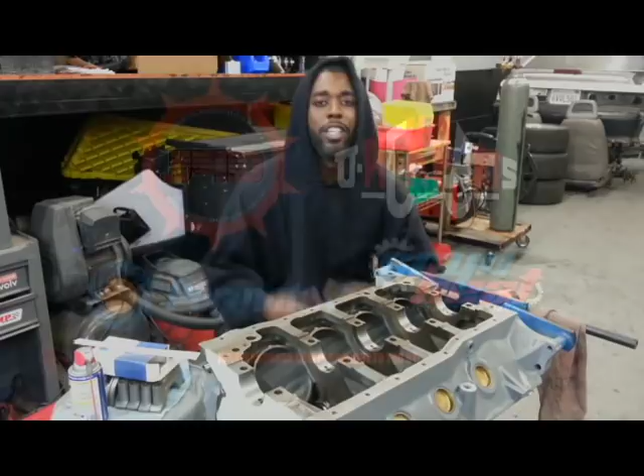So check it out. Project Mayhem, we got the block. Everything has finally been done, you know what I'm saying? So we've got the parts balanced. We got the pistons, the rods pressed onto the pistons. Everything's been done. So we're finally ready to actually put this motor together. It's been about a year.

I want to thank all y'all for being patient, you know what I'm saying? But hey, got to do it on your budget, you know what I'm saying? And sometimes, you know, it costs a little bit of money to get it done, but we're getting it done, you know what I mean?

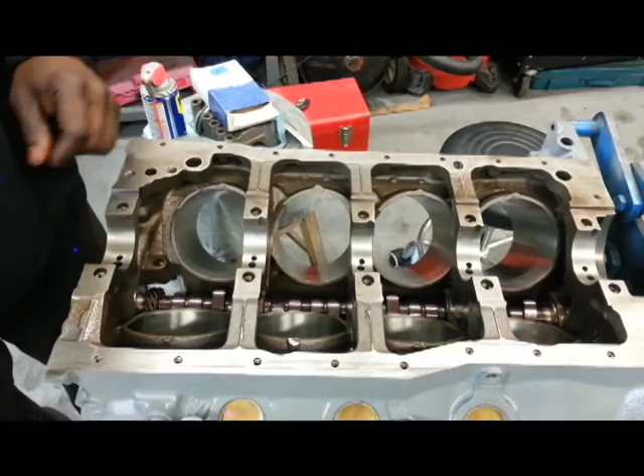So the next step, we installed the cam a few months back, and then I covered it with a bag and put it in the corner. So what we're looking at now is we're going to install the crank. The first thing that you have to do when installing the crank in the 302 is you got to make sure that these holes here, these are oil galleys, right? These oil holes, you got to make sure that they're absolutely clean. There should be nothing in there.

If there's something in there, you have to get it out, or you'll have oil pressure problems and you'll ruin the new bearings, and potentially your crank can have some catastrophic failure. So the first thing you want to do is check in these holes. Basically what these are for is when your oil pump is pumping oil, it's pumping oil through these little holes, and it makes a slick layer between the crank and the bearing so that it can rotate smoothly.

Okay? Now if there's something in there, it will not lubricate properly and it'll just burn the bearing up and you'll have a knocking motor in no time. So you got to make sure that these are clear. Whatever you got to do, maybe look down in there with a flashlight, make sure that they're absolutely clean. The next thing, you want to make sure that you take the bearing with the slot in it. As you can see, that one goes at the base, and this slot is to allow the oil from this hole here to pass through onto the bearing surface and to the crank surface.

Okay, the bearings that are on the top side look like this, so it's enclosed. So please guys, do not make that mistake. If you put these on the bottom, there will be no oil to your crank. It will destroy your motor in like a minute. All right, so you don't want to touch the surface with your fingers. If you want, put on gloves. Works a lot better, but I don't have any gloves right now, so I just try to make sure I don't touch the surface.

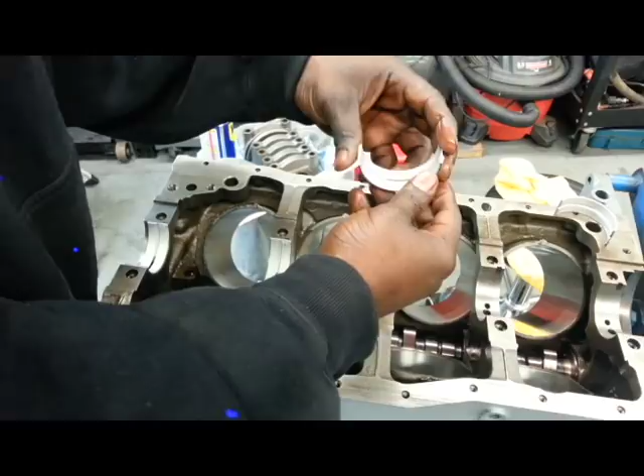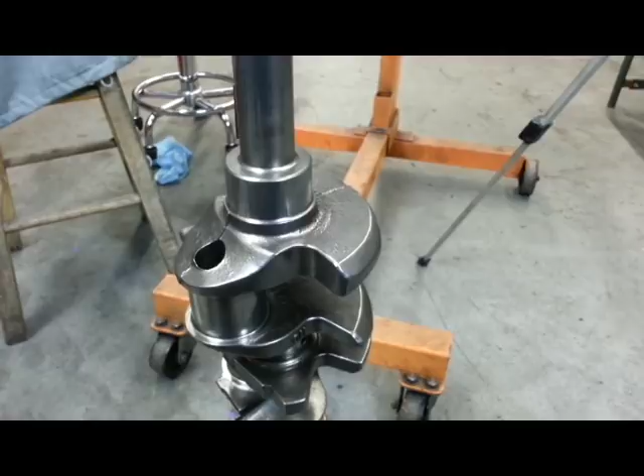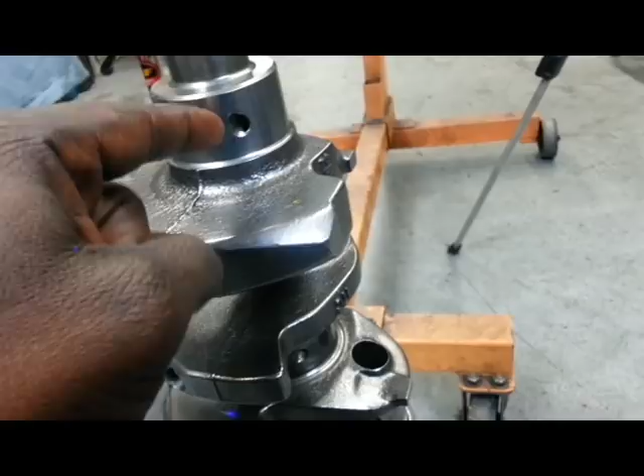Try your best not to touch the bearing surfaces, because apparently the oils from our fingers break down the bearing surface a lot faster because our bodies are real acidic. The next thing after we install the lower main bearings on the block is to check the crank. So what I did was I took air and blew through each one of these holes just to make sure that they're clear and free of any debris.

So you're gonna blow air through it, and then you're gonna look, because like I said, any debris that gets in there is gonna get in the oil and then ruin the bearing surfaces.

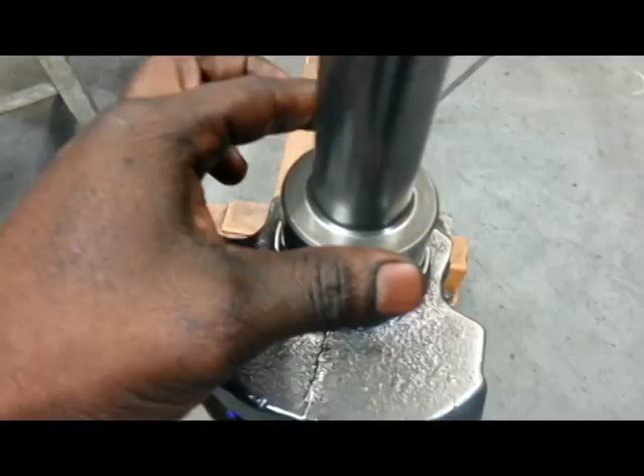Okay, so this crank has been cryo heat treated, which is basically cold forged, and then after that it was micro polished. Okay, so I had it turned before I did all that, 10/10. So it's 10 thou undersize, and I bought the bearings to match that. Now what that means when I say 10 thou undersize is that on this crankshaft surface right here, it was 10 thousandths of an inch thicker. All right, and I had them take off a layer because there was damage and take it 10 thousandths thinner.

All right, so when you do that, the bearings have to be 10 thousandths thicker to compensate for the thinner journals, which are these areas right here on the crank. This is called a journal. So once we do that and everything checks out, you want to check the journals to make sure there's no nicks and everything. Just one final go over. And at this stage, we're going to put it in dry. Now, once you install it, do not rotate the crank.

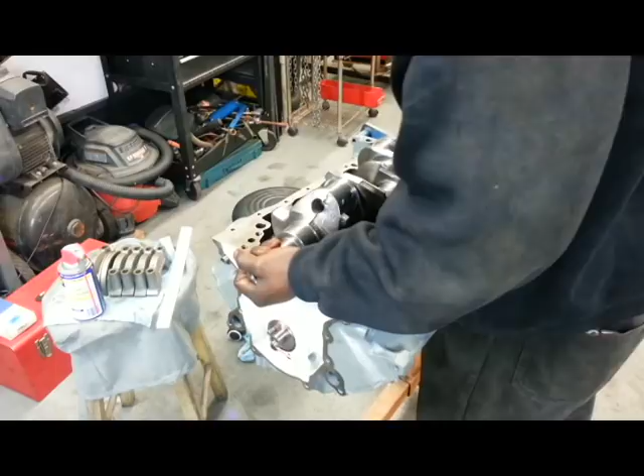All right, so we're going to get ready to drop the crank in. I can't stress this enough. Man, you got to be super careful when dropping it in, okay? So we're gonna just take our time here, just rest it in place. Boom, there it is. Now, like I said before, do not rotate the crank. Leave it. Don't rotate it at all, just leave it as it is, okay?

You take a piece of Plastigage, it's like a thin piece of plastic, all right, and you cut it to length and you place it on the crank, okay? Just in the center, vertical, in a forward and backwards position, just like this, okay? Just rest it on the crank. Don't press it in or anything like that. Don't gotta go crazy with it. But you're gonna cut it just enough to go across the surface of the journal. You're gonna place it right in the middle, okay?

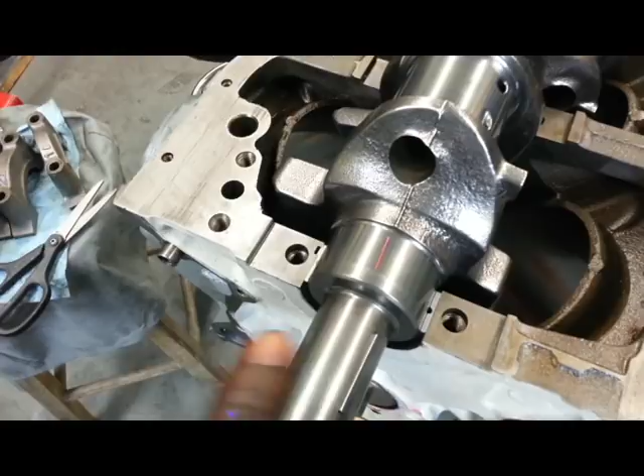So basically, to explain this in crude terms, you're measuring the clearance by the amount of squish. Squish meaning how much the bearing actually presses onto the journal. So we're going to see the actual space in between. So there you have it. It's a piece of Plastigage right there on the crank. Try your best not to disturb it. Like I said, do not rotate the crank when the bearings are dry.

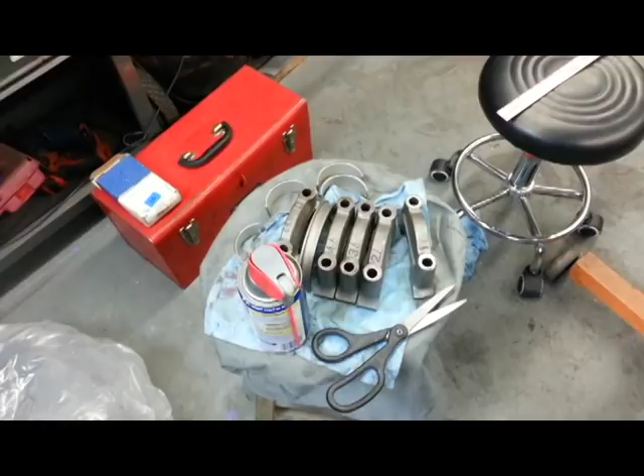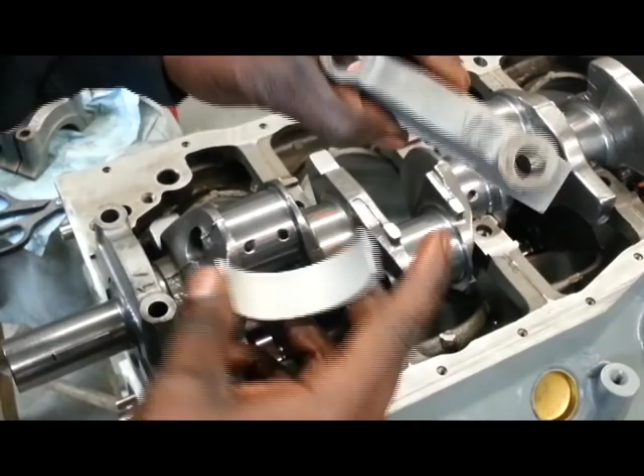And what we're going to do now is take the main caps here, install the cap bearings, and then we're going to go ahead and put the caps on and torque it down to spec. All right, so the goal here, what we're trying to achieve: get the bearing here, okay? Get the cap, it's number 2 cap. Make sure you keep them in position because there's 1, 2, 3, 4, 5. There's an arrow on them. Thank you, Ford, for that. To face forward to the front of the motor, which is right here.

Okay, and you take the bearing, and they got that little groove right there. And boom. You stick it right in there, just like that. Okay, make sure it's flat. See, that side is up a little bit. See, it's not cool. So you just press on that side. There you go. And there it is. It's in there. Now what you're going to do, carefully without disturbing the Plastigage, you're going to just rest it down in there.

Now these caps have a little bit of an interference fit, so you just take a rubber mallet here. Now you're not going to pound on it. Okay, I'm just going to give it a light tap, and it's in there. Okay, you move on to all the rest of them, do the same. Then we'll install the bolts and the girdle at the same time, because we want to torque it down with the girdle, because that's how it's going to be torqued. So we want to make sure that we get a proper reading with the girdle.

This is an engine girdle. This stops the caps from walking back and forth under high load. A great concept for supercharged motors, all right, which is what we're doing here. All right, so at this stage, when you see that all the caps are on and they have been tapped into place, we're going to take this main stud girdle.

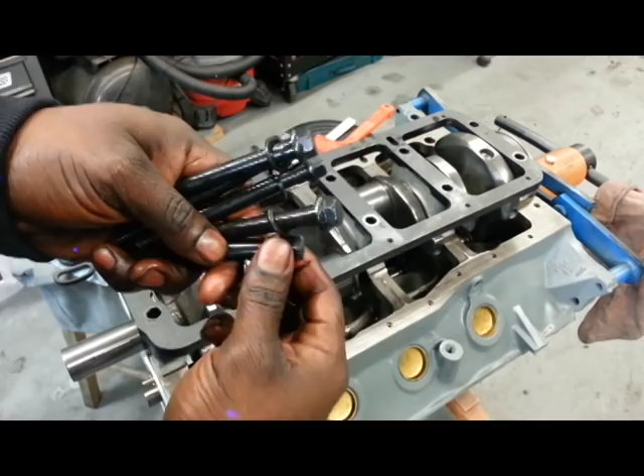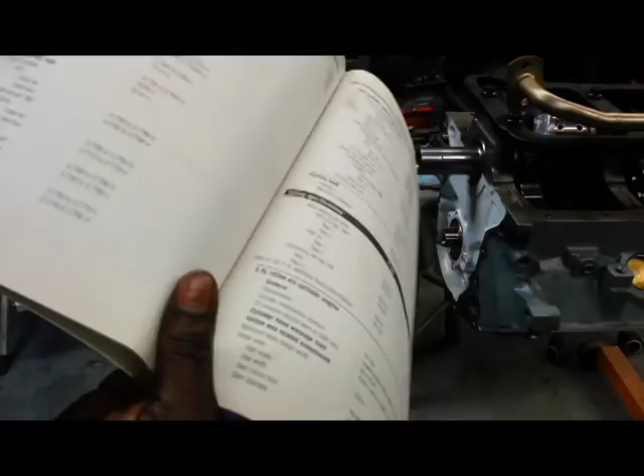Like I said, this stops the caps that are very thin from walking back and forth. All right, now the studs that I have here all come with washers except for one. And the reason why one of them doesn't come with a washer is because it actually holds the oil pump pickup in place. Now, no matter how long I've been doing this, I still refer to the manual to always be sure. You don't want to guess something like this. It's a very important stage in building a motor.

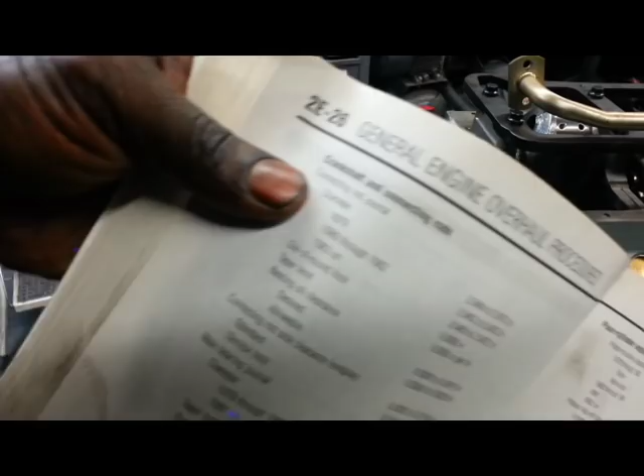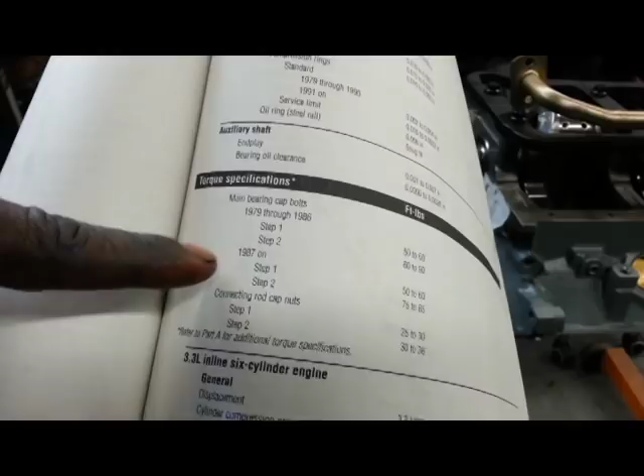Okay, so you're gonna see the crankshaft and connecting rods portion of your manual. This is a Fox body manual. I showed you guys when I picked this up sometime last year. So you're going to look for the torque specifications, as you can see here. And this is a block from a 96 Explorer. So we're going to say 87 on, and it's a two-step process.

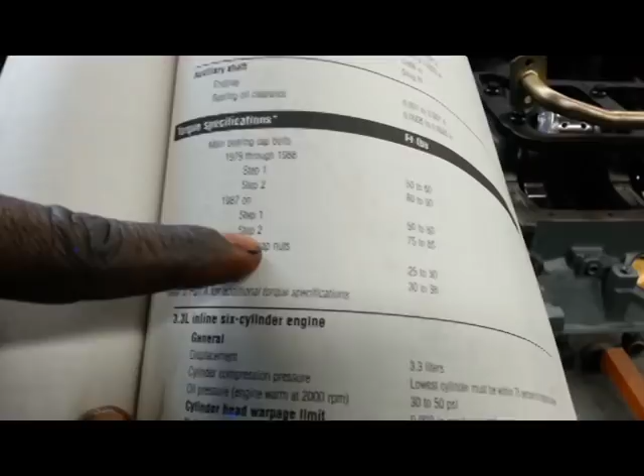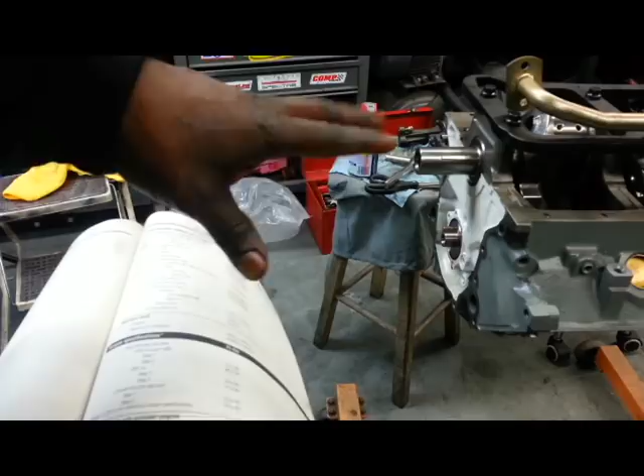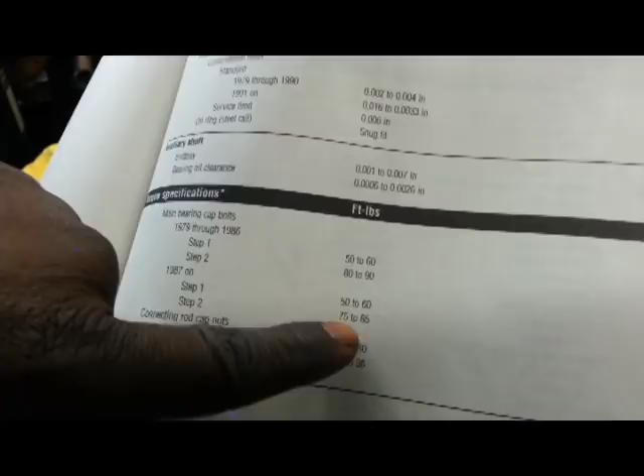So it's 50 to 60 foot-pounds at first, and then you finish off with step 2, which is 75 to 85 foot-pounds. Okay, these are not ARP bolts or anything. If they were, ARP has their own torque specifications and their own torque setup, but these are not ARP bolts. These are bolts that just came with the girdle. So what we're gonna do is first torque it down to 50 to 60, so I'd say right in between, 55 foot-pounds, and then we'll finish it off right in between at 80.

And when you're putting these bolts in, you want to make sure that there's oil on here. You don't want to put them in dry. When you put them in dry, it causes unnecessary stress on the bolt, and it can actually cause them to potentially break. So that is something that's also mentioned in the manual as well. The Plastigage underneath the surface here is going to squish down.

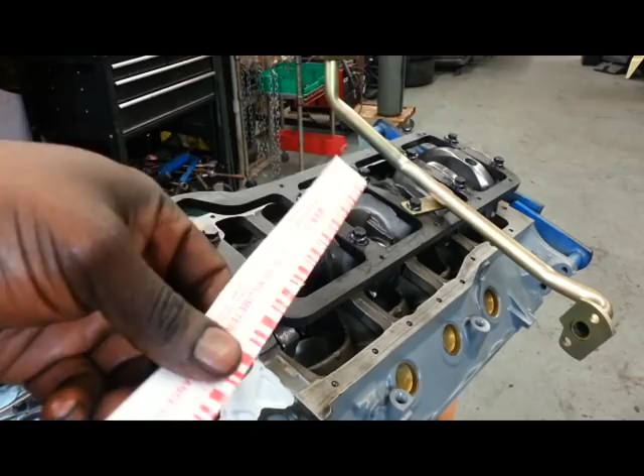Okay, so now that we torqued it down, give it a few minutes to let it settle, then take the bolts back off again and check the measurement. The way that you check the measurement, on the Plastigage there is an indicator. You see these little spaces here? This tells you the thickness of how much the Plastigage got squished, and that'll tell you the measurement based on that.

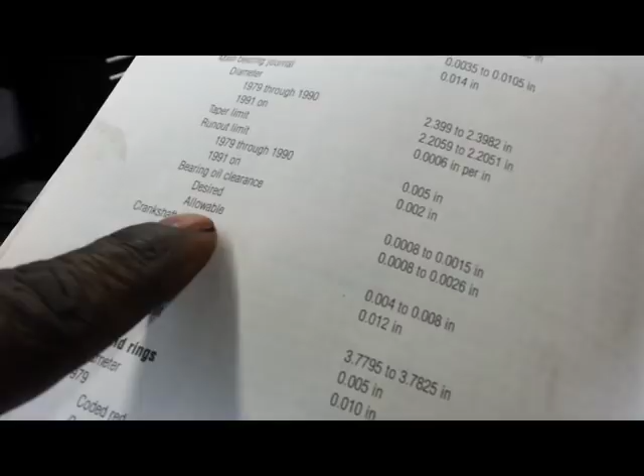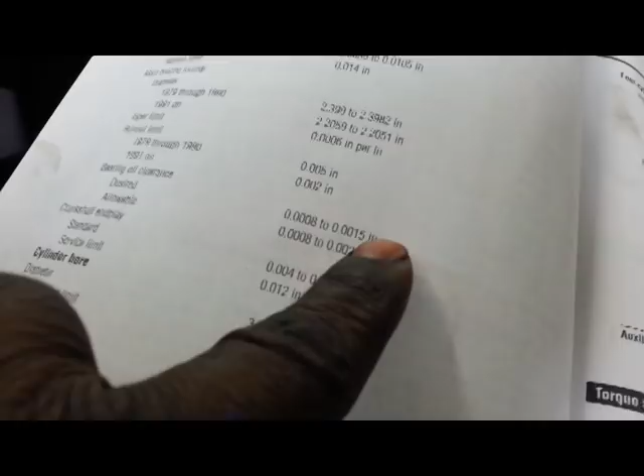You're gonna see the bearing oil clearance here. So the clearance, as you can see, is 8 ten-thousandths to 1.5 thou. That's desired, but it's allowable to have 8 ten-thousandths to 2.6 thou. Okay, so 2 thou pretty much. I usually don't count the last number, but 2 thou. So it's really, really tight. They don't want any slop in there, because if there's any slop, it's gonna just blow up on you like a grenade. So let's go ahead and remove the girdle and see what we got.

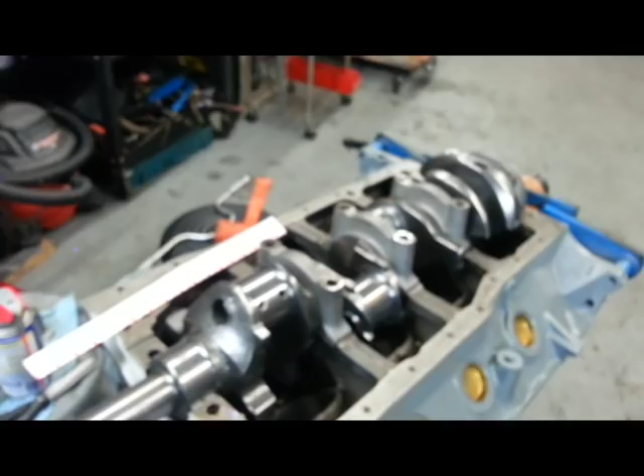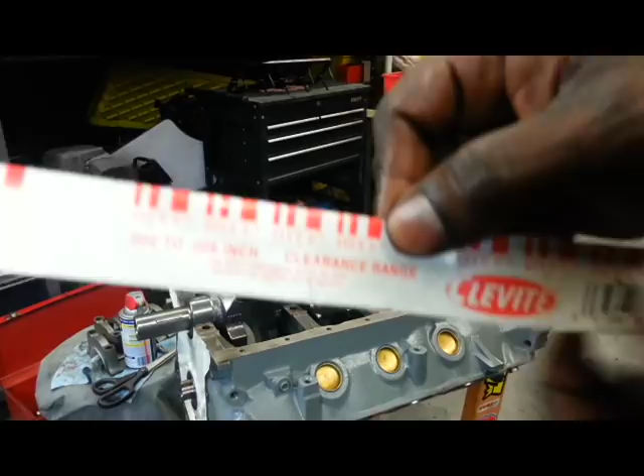All right. So you're gonna take these gauges and measure and see which one it closely resembles, and that's how you're gonna know what the clearance is. We're gonna do that to all the caps all the way across until we get a measurement that we're comfortable with. So it's crazy. We're coming in just at 2 thousandths here. Just barely made it.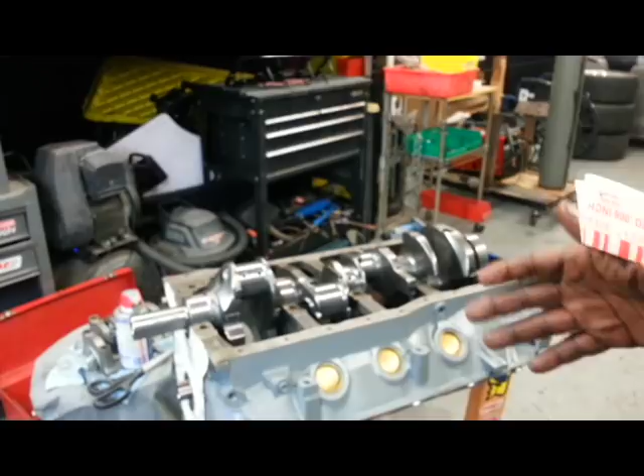It's quite a bit on the loose side, but I think it's because I had the crank turned 10/10, and then I had somebody else cryo heat micro polish it on top of that, so it just brought it down even more. But we got lucky. We are just in spec. So with that being said, let's remove the Plastigage off of the surfaces. I'm going to use like an old credit card or something and scrape that stuff off. Make sure none of the debris falls down in the motor, and then we'll move on to adding engine lube and the rear main seal.

We took the crank out and broke it all the way back down again. Now that we know that we're in spec with the oil, let's go ahead and put some engine assembly lube. It's Permatex Ultra Slick.

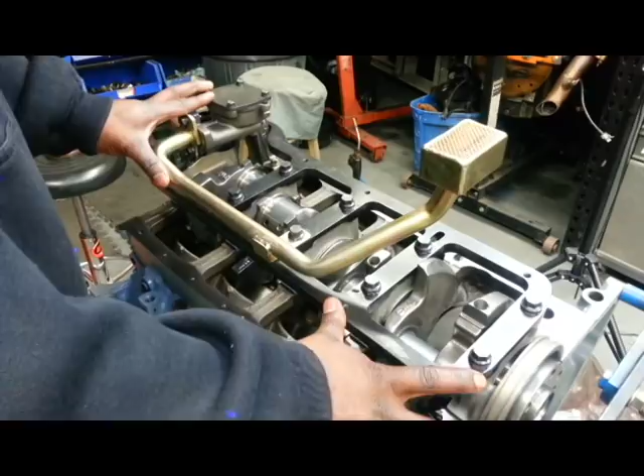Here's something that I feel is very important that we have to cover when it comes to adding a main girdle to your motor. A lot of motors won't have this issue because they're not going to have this main girdle, which gets in the way of a lot of things. But you do have to keep in mind that you still have to maintain the manufacturer's instructions when tightening the bolts down, and I'll explain why.

When you tighten down anything metal to metal, you're gonna have the problem of warping. So if we were to, let's just say, tighten down the bolts on the outside of the crank first, and then moved in, which is totally opposite of what the manufacturer suggests, then you would have the crank kind of bowed like this, because it would tighten down the edges, and then you'd be trying to pinch these ones in the middle down. So under heavy load, it would actually crack. The crank will be subject to cracking.

Now, when you have this situation, what you have to do is you take this oil pump pickup and you actually spin it to the side, tighten the middle ones down first anyways, then you do 2, then you do 4, then you do 1, and then you do 5. After you do that, you're gonna go back and untighten just this one bolt here that holds the oil pump pickup, and then you spin the oil pump pickup back to the position it's supposed to be in, and then you retighten it again. So that's how you get that on.

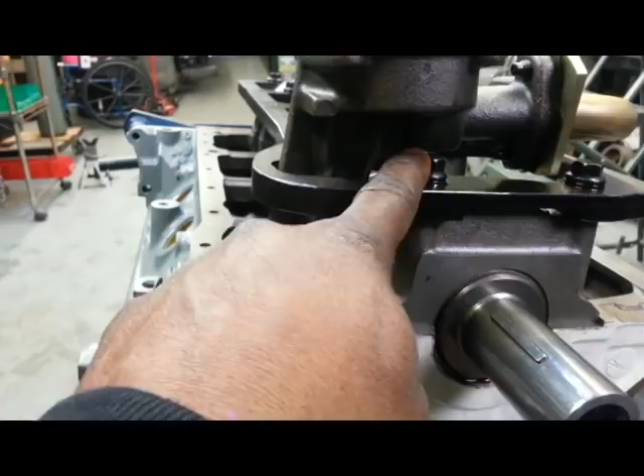One of the other questions that I get as well is, how do you stop this from happening here? You don't want any metal to metal rubbing, so we're gonna actually have to remove this oil pump once again and grind down on the pump a little bit, because once we start getting some motion going, it's actually gonna rub on it and cause some metal shavings in the oil. We don't want that.

Also, the tightening spec for this gasket here is supposed to be 25 foot-pounds. Now, you gotta wonder, how do you get 25 foot-pounds of torque with it being such a small space? Needless to say, it's very difficult. You have to have a very small torque wrench, or I use the old school method where I use the amount of rotation to make sure that they're the same torque.

So you bring it down till it's snug on both sides. There's a bolt here and there's one on the other side. Bring it down snug, and then I did a quarter turn, and then a quarter turn, and then I did another quarter turn, bam, and then did another quarter turn. So that is my method.

But like I said, we have an issue here because this is rubbing, and we can't have that. So we're gonna have to remove this oil pump once again, and grind down on the pump a little bit right there so we can get some clearance. So what we're gonna do right now is just mark it and use that as our guide as to how we're gonna grind it down.

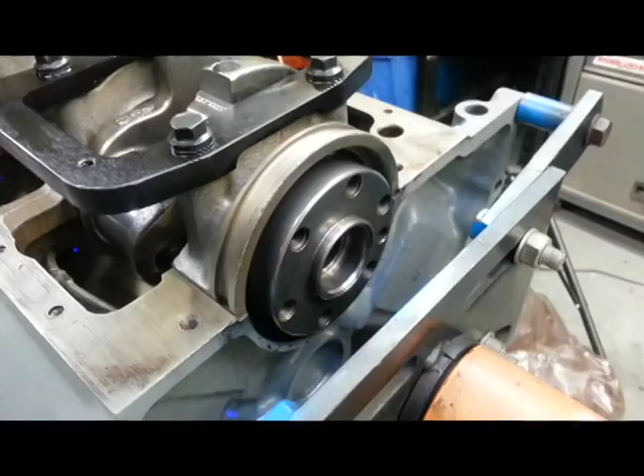So the last thing that we gotta pay attention to here would be the seal. A lot of people would say, oh, you can put the seal on before the crank goes in. Here's the problem. If this seal is already in and you have the top side open as you bolt this cap down, it'll tend to squish it and make it into an oval, and you don't want that to happen. It's going to start leaking.

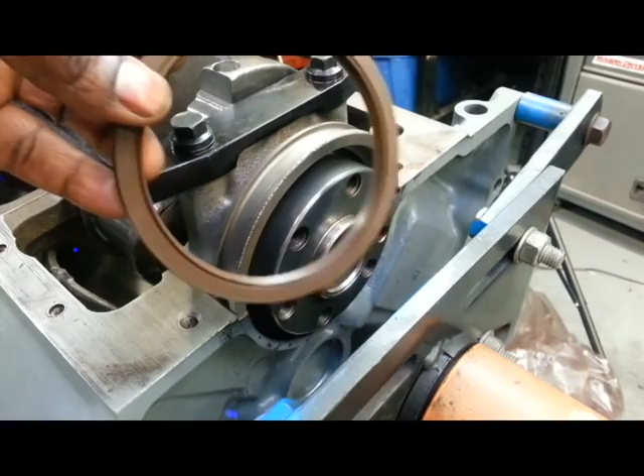So basically, this is a one-piece seal, which is a great idea. I'm glad that Ford decided to do this later in the 5.0 or the 302's life, because it stops a lot of leaks and a lot of problems. So I'm going to use some Permatex Ultra Slick once again. Put a little on my finger here, and you're going to use it on the inside portion of the seal. Get it nice and slick. This is to stop the seal from tearing as you install it.

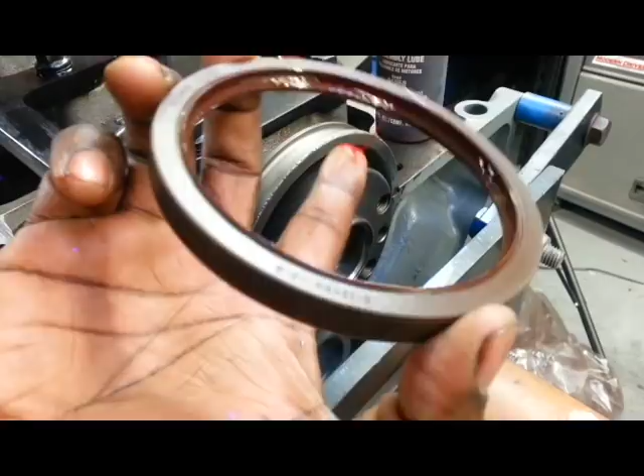Second, after you put your assembly lube on the inside here to slick it up a little bit, so it goes over this surface of the crank, you've got to make sure that this surface is really smooth.

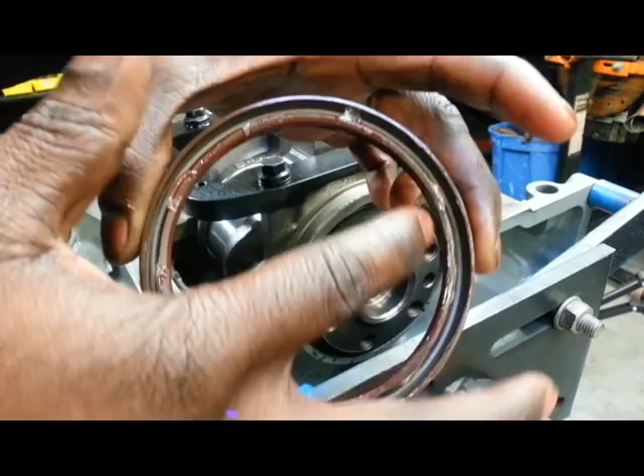Mine was micro polished, so I know it's smooth as butter. I also put dabs of grease in this part of the seal here to keep the spring in place. Last thing you want to do is smear some oil, some engine oil, all around the edge of the seal here. Okay, just like that, so it gets into place. So you're gonna take this part of the seal here and face it towards the motor.

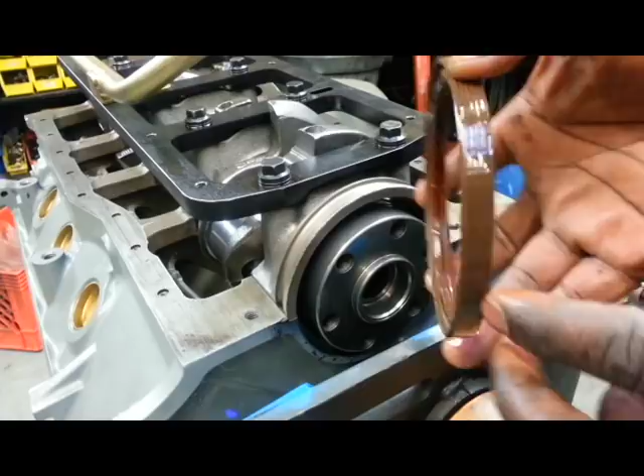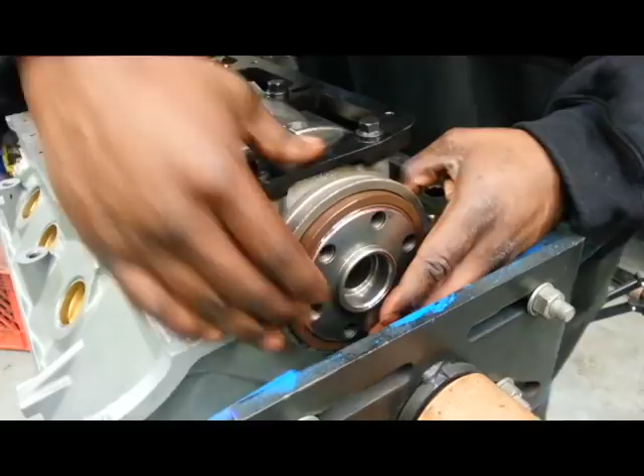Okay. Now, let me go ahead and slowly bring it in here. Once you get it to that point, you're gonna take a mallet and a punch and just lightly tap it. Don't hammer away at it, but just lightly tap it. It might be a little difficult because we can't tap it at the bottom like we want to, but you want to push the bottom in first.

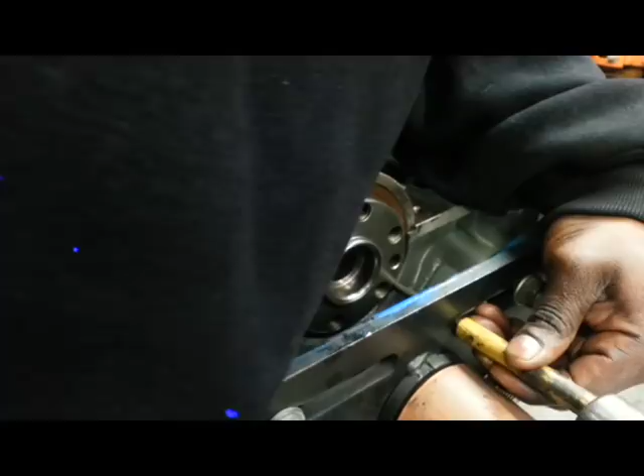I'm gonna sneak the punch through the engine stand here. Give it a few little love taps at the bottom here. You're gonna hear like a more dead, flat sound once it bottoms out. You don't want to keep hammering on it because then it'll start to bend the seal all up and then you get a leak. Okay, that's the thing. You just want to gently tap it in. Once you feel like you got to start hammering on it, then you're gonna have a problem.

Okay. Yeah, we're in there. Boom. So the seal has been installed. No dings, no dents, none of that. You've got to be very careful with that, because this is one of the most irritating things to go bad on a motor. Once it goes bad, it causes a huge bunch of oil, gunk all over the bottom of the motor. Actually, Project Mayhem, the motor that was in it before, actually had this issue, and it made a mess. There was just stuff everywhere, oil everywhere. So, yeah, there it is.

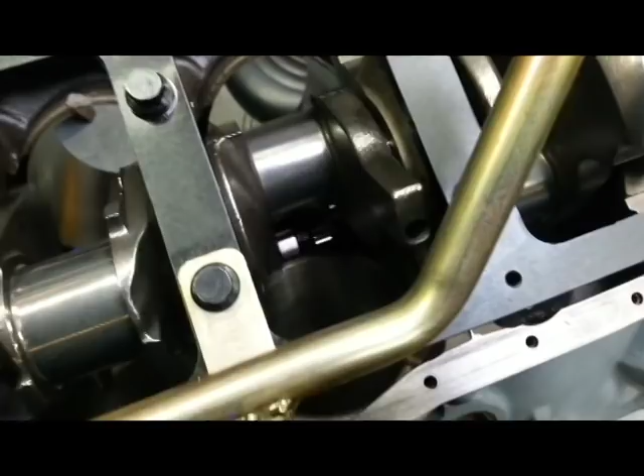So let's go on ahead and move on to checking the crank's rotation. So now we got the crank in there. Once you have it at this stage, you're just gonna go on ahead and rotate it. Make sure it's spinning freely. Just check everything. Okay, good. We don't have any problems here so far.

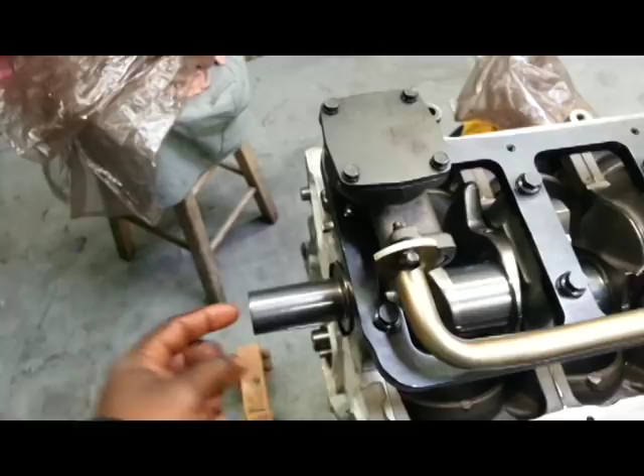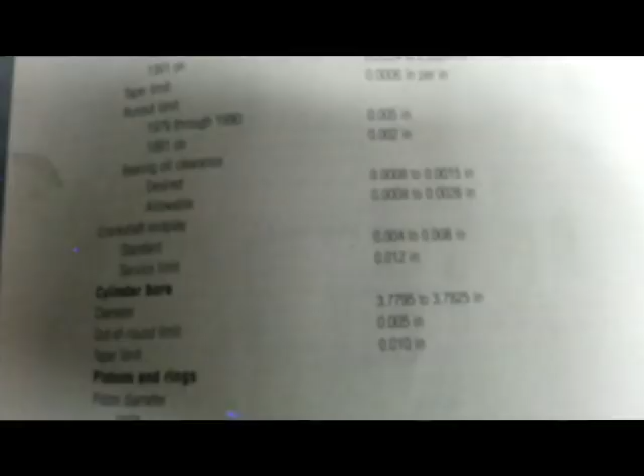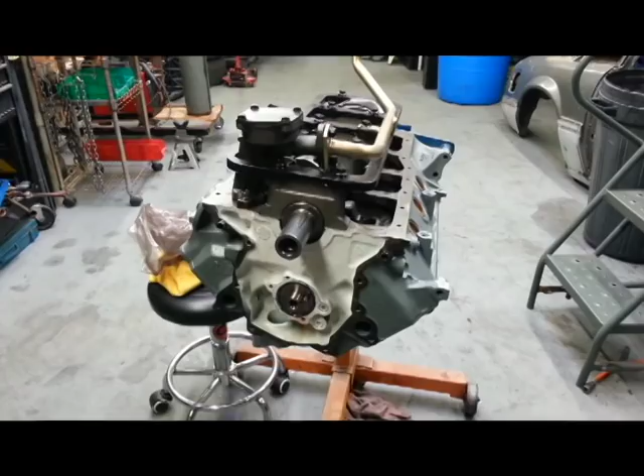So the one thing now you have to check is end play. Basically end play is how much the crank moves front and back, okay? Because it's got to have a little bit of give front and back as it's operating. It can't be too tight or it'll just bind up. So the trick about doing that is you need a dial indicator with either a magnetic stand, or I have a different type, but it also works. And you put the dial indicator on the tip here and measure the end play. So the crankshaft end play here is 4 thousandths to 8 thousandths. Okay, maximum 12 thou.

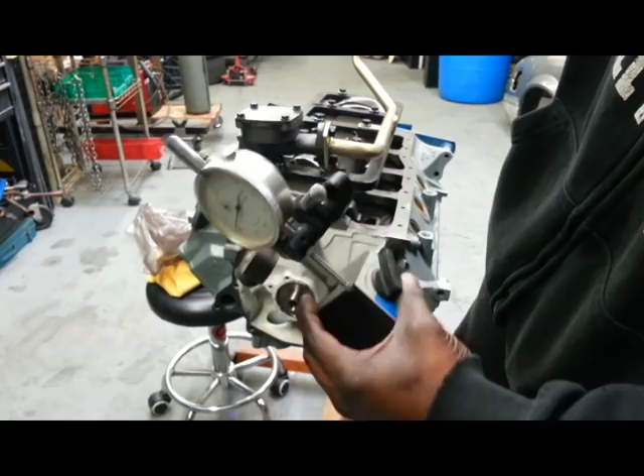So now we're at the stage we're going to measure the crankshaft end play. All you're going to need for this is a mallet, a breaker bar or a crowbar of some sort, or pry bar, and a dial indicator and a magnetic stand. Like we checked in the manual, end play should be 4 to 8 thou. So what you're gonna do is take the mallet, you're gonna hit the crank a couple times. You make sure it's seated all the way backwards.

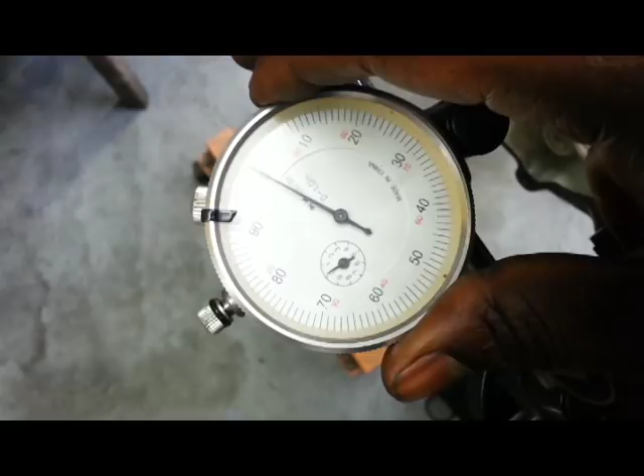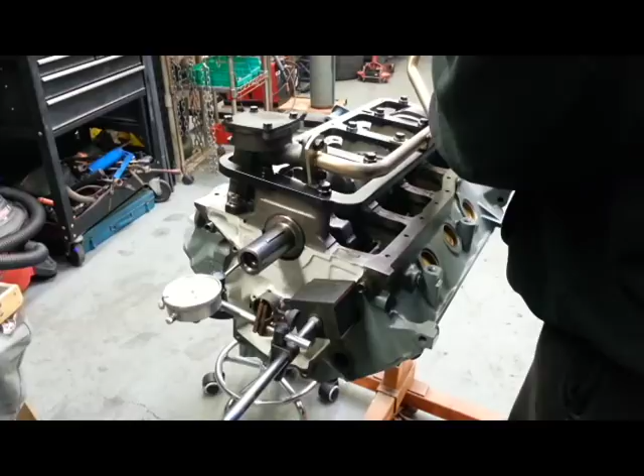Next thing we're gonna do is set up the magnetic dial indicator so that the tip here is on the edge of the crankshaft. Then you're going to set the dial indicator to 0. Boom. So now that you got your dial indicator set up, and you make sure that it's on 0, you're going to take the pry bar, and you're going to gently put it between one of the mains and the crank, and pry it forward. Let's see what measurement you get. It's right at 4 thou.

So we got 4 thousandths end play. So we're in spec. We're just in spec because it's a brand new bearing, so of course it's going to be very tight. Once we start it up, it's going to wear down over time. But it's actually very good to start at 4 thou because if there's too much slop back and forth, you're going to have some issues. All right, so let's move on. There it is. The crank is now installed on Project Mayhem. So in the next episode, we're going to deal with the pistons and rods.